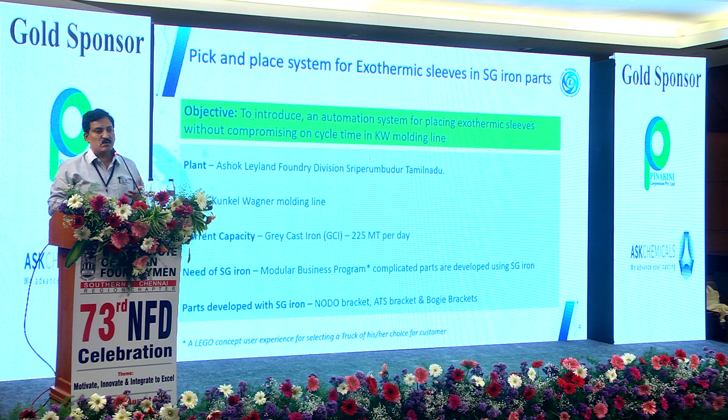It's a Lego concept. Similarly, if you go to a pizza store and want to order a pizza, you have a menu with different sizes, different layers of topping, and different ingredients. You just order according to that and get the pizza delivered at the next counter. Similarly, we want a dealer customer experience where we give the customer the choice—go to a dealer place, press 10-15 buttons for whatever options you want, road condition, load condition, and you get the vehicle you want.

He can place an order. Once he likes it, it goes to a manufacturing line and follows a sequence of manufacturing. That is the concept we introduced in 2020 when COVID was about to start, the pandemic. It has picked up in a big way, and we are almost getting orders where 30% of our ordering is in that concept.

Our customers are feeling happy because they are getting the product what they want, instead of us giving something traditionally where they have to choose. Here he is choosing, and we are making it as per his choice.

So we have 3 products in that vehicle concept, that is Nodo bracket, ATS bracket and bogie bracket. So why long SG iron products in trucks?

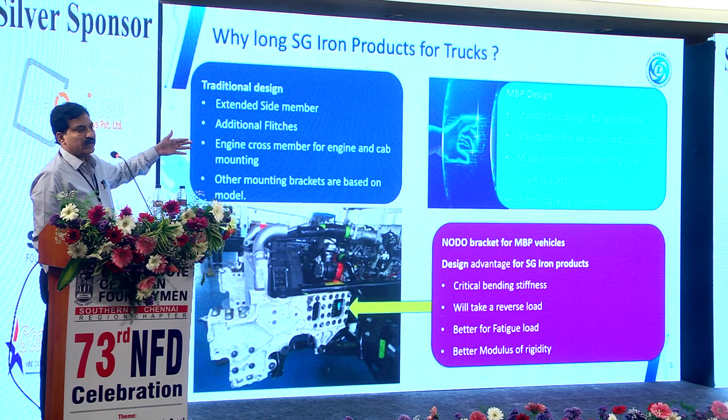Traditional design uses extended members and additional flitches like engine cross members. In the modular business program design, we have a standardized design for all the vehicles, standard for all road conditions, which will withstand that. Multiple mountings on a single bracket is the main advantage, since you have so many fittings coming into this.

Then better stack up tolerances. Because you have an integrated member, you have better stack up tolerances, and it will help you in better vehicle rigidity. So this is one example.

What we are saying is a Nodo bracket, which has critical bending stiffness, will take a reverse load, better fatigue, and better modulus of rigidity. These are the examples I have shown you.

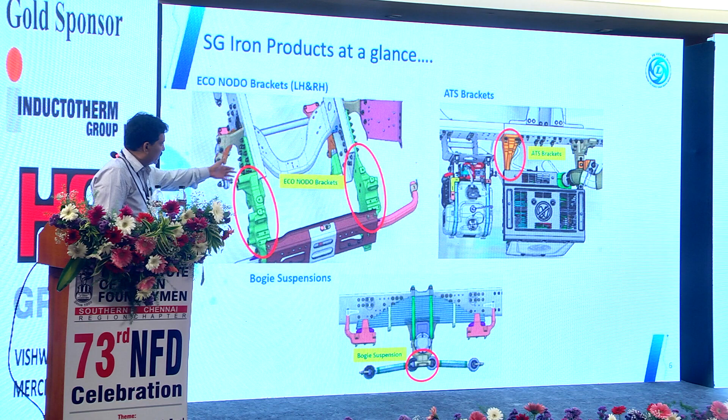This is a Nodo bracket. There is an ATS bracket supporting the after treatment in the vehicle. Then we have a bogie bracket, a bigger element, which is almost weighing 500 kg.

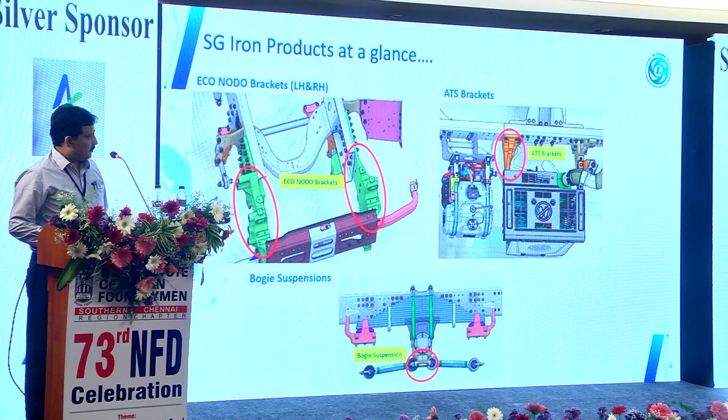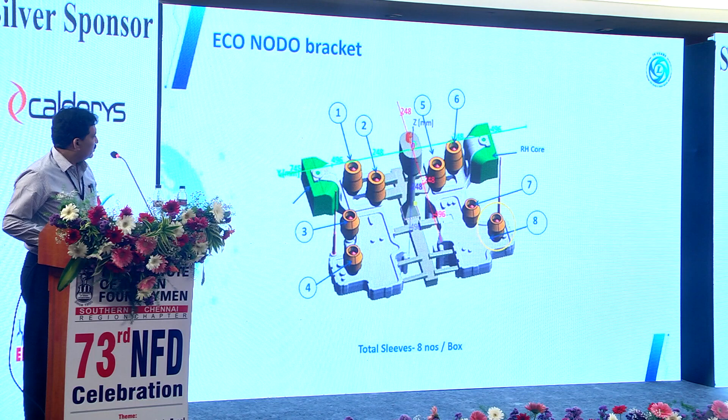This is a typical Nodo, Eco Nodo bracket. It's the arrangement in the mold box. Different types of sleeves are there. This is the arrangement what it looks like.

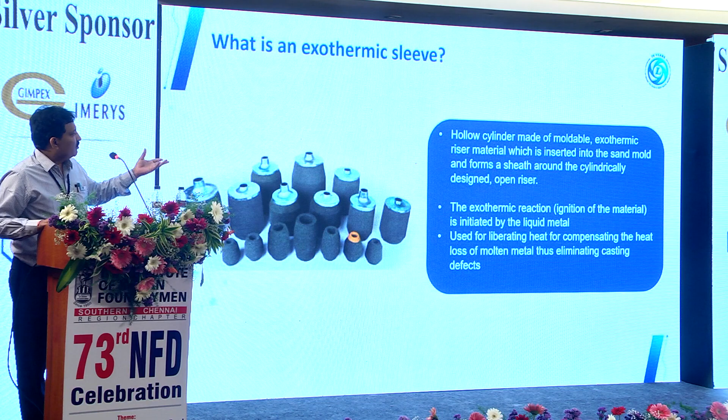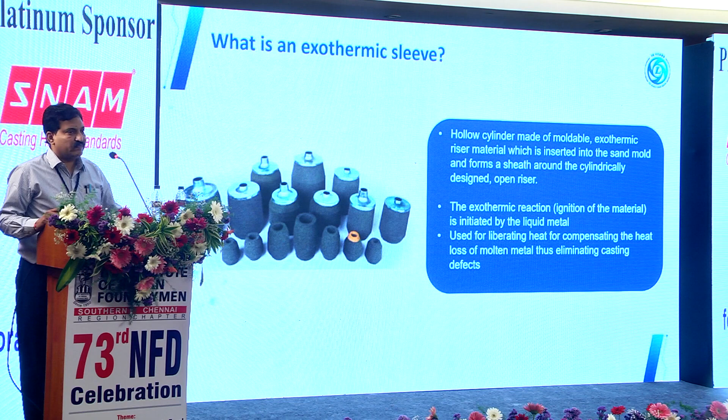This is made just for understanding what is the exothermic sleeve. An exothermic sleeve is a moldable material in the risers. You see that exothermic reaction, it melts and keeps the hot metal intact, and it flows, maintaining the temperature and flowability. This eliminates casting defects, mainly used for casting defects.

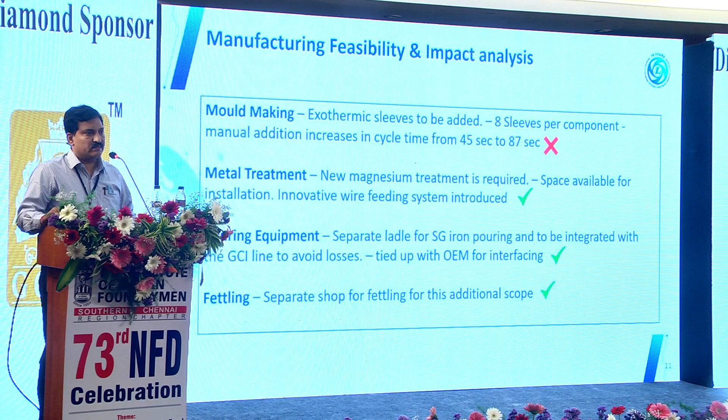So while introducing this, we checked in SG iron parts whether all our lines are ready. We checked in the molding, mold making area, so sleeves are to be added. When placing this sleeve, I have a challenge of traditional machine cycle time going from 45 seconds up to 83 to 87 seconds theoretical time. It's increasing. There is a challenge.

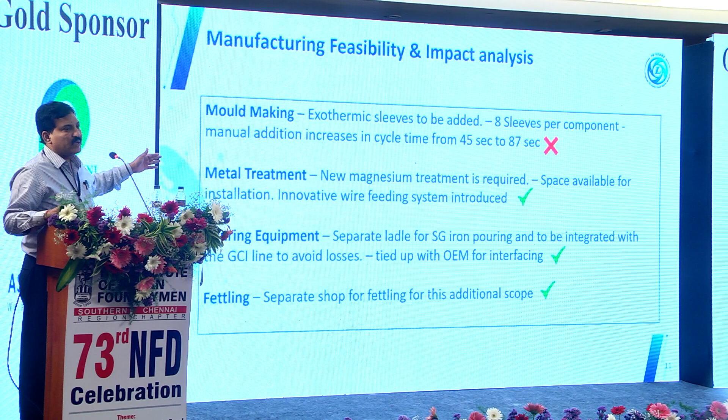We have a magnesium treatment, metal treatment. We introduced an innovative wire feeding system, which is solving the problem of magnesium treatment. On the pouring equipment, we have a separate ladle for SG iron pouring, and we have tied up with the interfacing because we need to pour and interface with the molding machine. With the OEM support, we are able to do that.

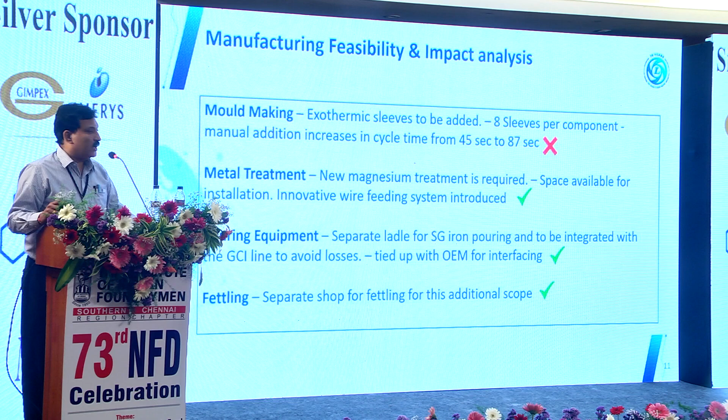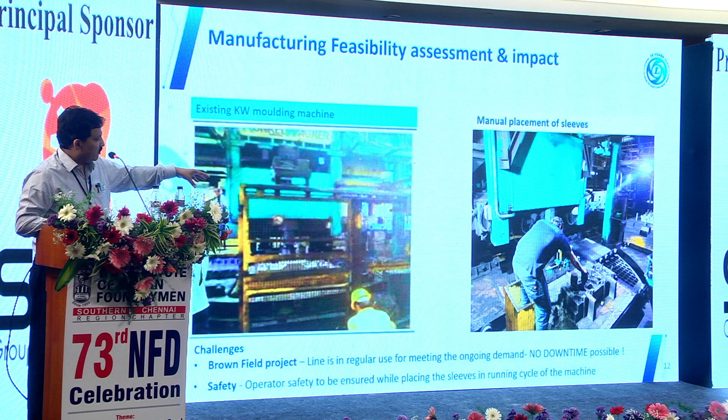And in fettling, we have a separate area, so it is nothing to do with the regular process. With all these things in mind, in the existing molding KW machine, the sleeves which have to be placed on the machine are placed by compromising on the safety and placing onto the drag. So we have a regular running line.

Please understand, in a day we will be running GCI, grey cast iron, as well as SG iron we have to run. The first time when we introduced it, you have to intervene and go in to place the sleeves on the line. It is a safety compromising thing, as well as more time is taken.

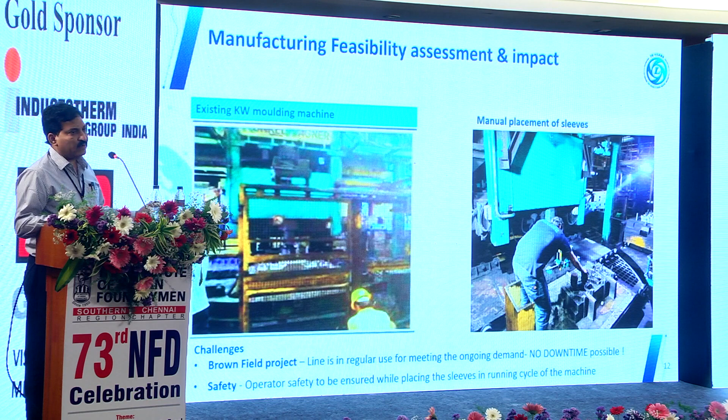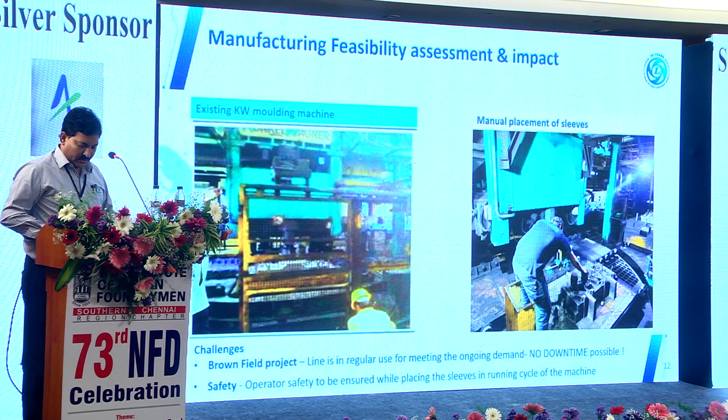More than safety also, safety is of paramount importance. The time taken is very high, so you have to stop the line for a longer period. With that in the background, we plotted down what all the activities involved. Against the activity, as a planned requirement of 45 seconds, we are going up to 87 seconds, which is more than 93% higher.

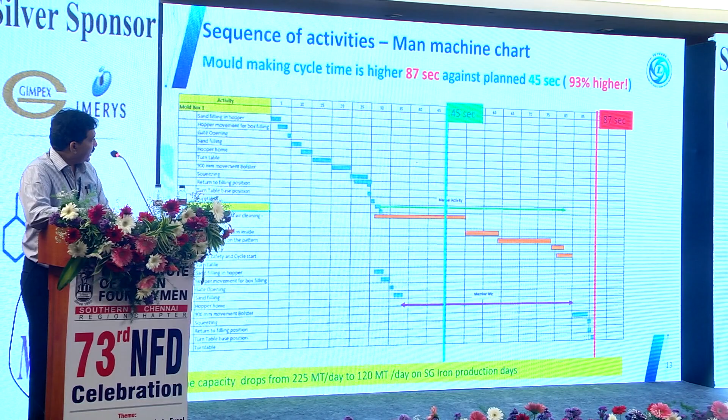Because of that, what is happening? We have a grey cast iron requirement of 45 seconds. In SG iron it's going up to 87 seconds, and the capacity is dropping down more than 50%, around 50%. And more than that, I told you about EA index. EA index is an Ashok Leyland standard, efforts and ergonomic index. We have an index which will show how much effort is required by the operator and how much ergonomics is used in these operations.

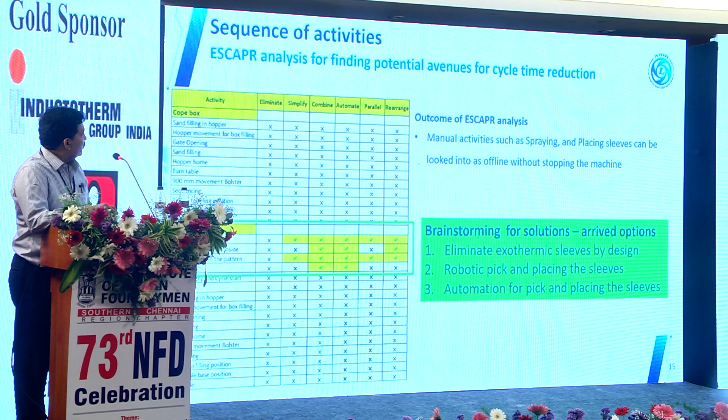So we have gone with a regular problem solving approach. This one, for those of you who are not familiar, is various methods used for simplifying the operations, like eliminate. Can you eliminate some step, whatever the process steps previously are listed down? Can you simplify? Can you combine? Can you automate? Can this activity be done in a parallel way? And can you rearrange this system, whatever the system available?

Out of these things, we found out that in a particular area where I highlighted yellow color, there we are having the scope for improvement. So we have manual activities such as spraying and placing the sleeves that can be looked into. Can it be done offline without stopping the molding line? When we did that, we came out with a brainstorming idea from the team.

Can we eliminate? We just questioned. Like earlier, can you ask without additives, without resins, can you do the mold making? Yes, we can do it. So similarly, we asked, can you eliminate exothermic sleeves by design? Similarly, robotic pick and place, can we do it? Can we do some other automation? So we had these ideas.

So when we went to the drawing board, we found out that these thin sections are not possible, they cannot be modified because of these critical design factors. These trucks are designed, as I told you, in modular fashion. When you are having a heavy load, I cannot design for a lower load, and then when heavy load comes, this bracket will fail. I don't want it to fail in the field. So we cannot modify, there is no compromising there.

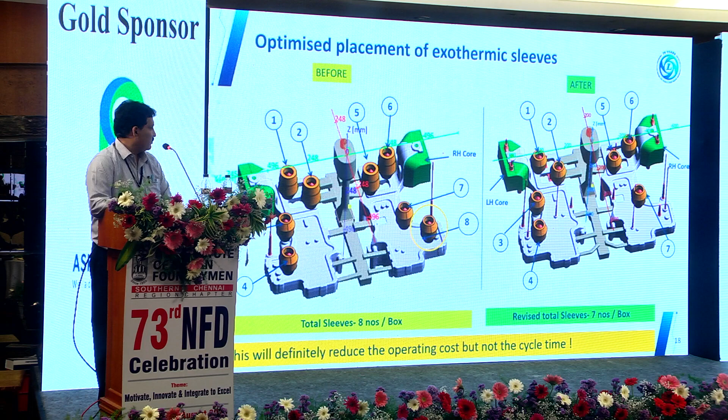So then we did the magma analysis and found out the hard zones and all. We found out that, okay, we can optimize maximum. My design department told me we can reduce a maximum of one sleeve. So what else? So they have given this design. This will definitely reduce the operating cost because one sleeve is costly. All of you know that exothermic sleeve is a very costly process. But it cannot reduce the cycle time.

So we've gone with a robotic pick and place system. This molding machine is there, so it can pick the sleeves from the storage area and place them. What we found out is a very good solution: faster placement of sleeves, completely automated, integration is possible, operator safety is 100% ensured. So what are the negative points?

Still the cycle time is high because in 18 seconds, 20 seconds, we need to place this pick and place. So we found out that overall for one cope and drag it is taking 75 seconds against my planned 45 seconds. So more space is occupied and it is also going into the gangway which is working space.

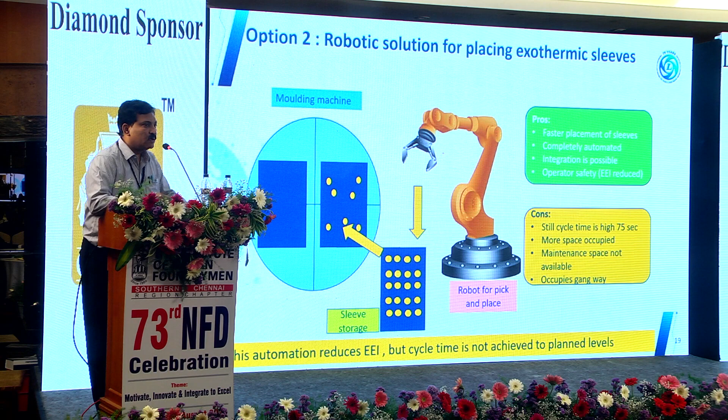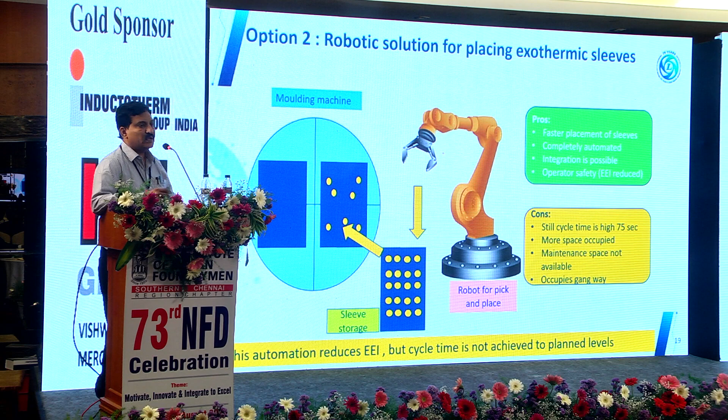Robo needs a protective space, you cannot take chances. Sometimes it malfunctions, you have to go into the backside, so you cannot compromise on that factor of the robo. Nowadays robos are coming with a factor where you can define the working zone, but still maintenance can override it. When you are doing maintenance, something can happen also. So those type of things we need to take into account. So this automation reduces EEI, but cycle time cannot be achieved to the planned levels.

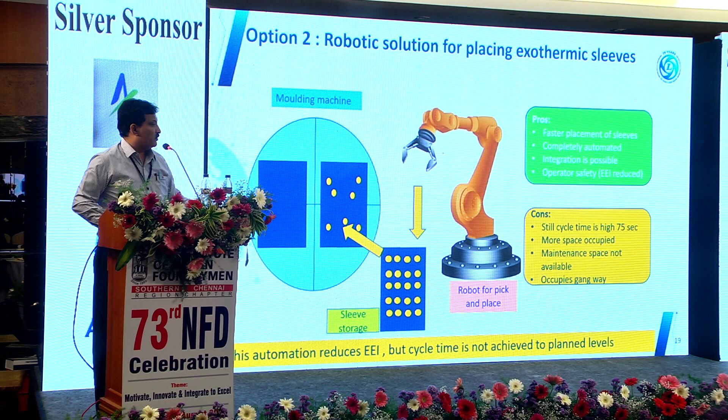So what about automation? Can we, we don't have any other choice, we have to go for automation. What the OEM has told, sorry boss, I don't have such technology with me. I had done somewhere in Germany. I heard the Indian counterpart told me, I heard that somewhere in Germany it was done, but we don't know.

So the second thing is there is no similar experience in other foundries also, whatever limited. Then automation houses, a lot of automation people come to you every day, saying we do this automation, that automation and all. So when we approach them, sorry, we don't have that experience in this, we can attempt, we are ready. So in a brownfield project, we need to have assured solutions, then we can take the risk of going to an automation solution provider. Whereas in this case, I am having a person who will tell me that I will do it.

But at the end, if the team doesn't have the experience, at what cost do I do this automation? So I have to be very careful. We decided our team has to transcend to a higher level. We pursued the OEM - let's take the risk. This was the biggest point, we decided to take the risk and go ahead.

Then we encouraged collaborative work. We collaborate, we share our knowledge - you put your knowledge and take this forward. And we used AL's own expertise. Ashok Leyland has our own team who does automation day in, day out in many of the manufacturing lines. So why don't we leverage that experience? That's the path we took.

So we decided to co-design the system with the OEM - we approached them, and as a result we pursued the OEM. Yes, they agreed, yes we will take it forward. And design verification was done for effectiveness, with multiple iterations. It's not that we just did it casually.

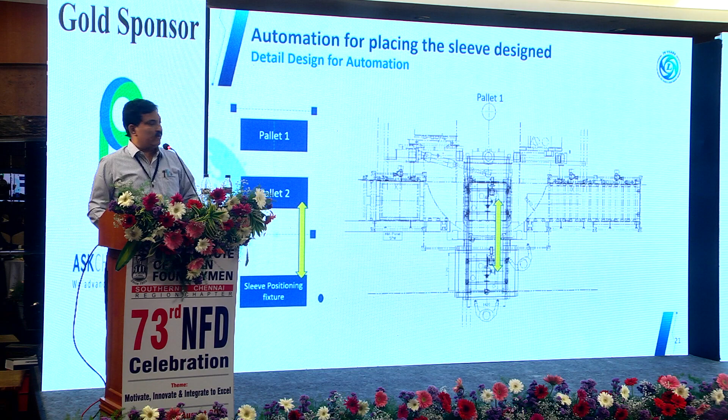Then we did verification of interlocks. We didn't want the molding machine team to later say, sorry, we checked our PLC and this integration isn't possible. So we did upfront verification with the OEM. Why I'm emphasizing all this is that these are things you need to do in parallel before implementing a solution, before concluding, even before ordering.

That enables you to sail through the total process and crush the customer lead time. Many times the customer wants it in 2 or 3 months - how do you squeeze those timelines if you go sequentially? So this is one automation we thought through, and we went ahead with pick and place.

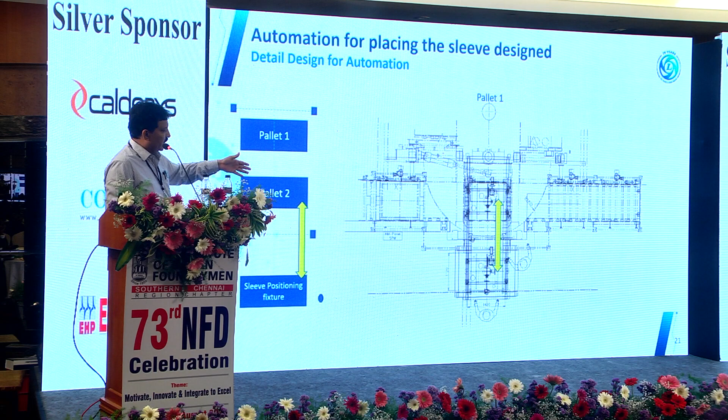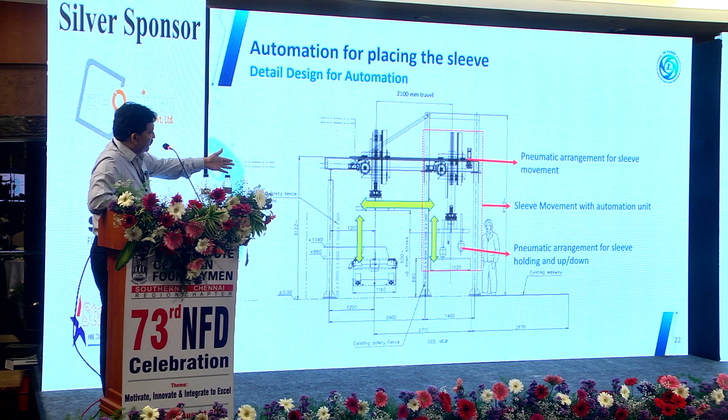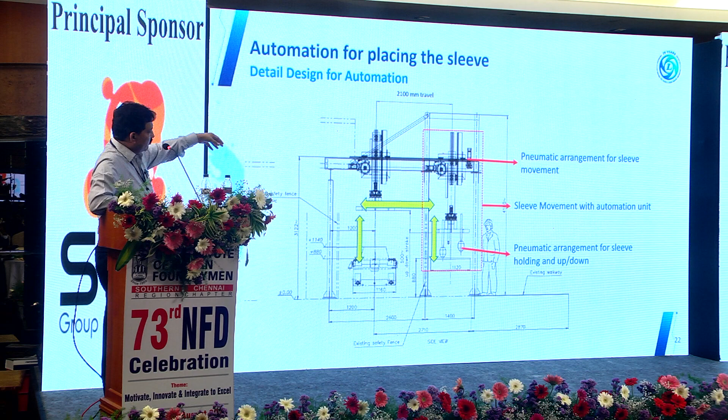The operator is now placed here - let's move forward, I'll show you better in the next view. There is a pick and place mechanism. The yellow arrows indicate how the sleeves are placed in a convenient position for the operator outside, where they are picked up by the gripper. It moves inside the molding machine, places the sleeve, and then goes back. This is a very good mechanism - we were happy to arrive at this solution.

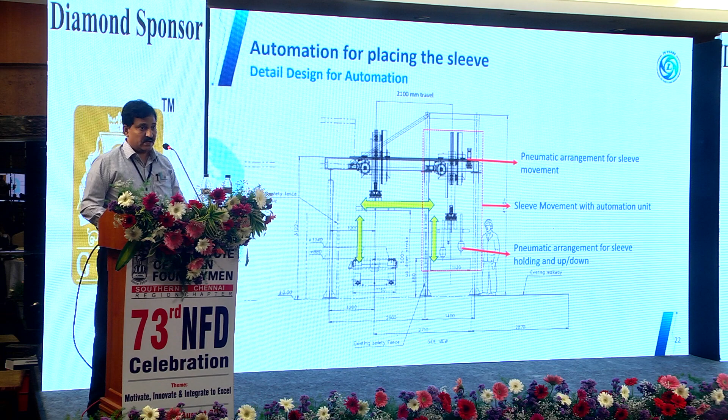So we did the cycle time mapping. Originally 45 seconds, but we found it came out to 62 seconds. So here's the question - for grey cast iron 45 seconds, for SG iron 62 seconds was okay, and management said the low volume is there, you can go ahead. But what if the volumes increase? I'm compromising from 45 to 62 seconds.

Those working daily on the molding line know how much this impacts productivity. You're going to lose heavily on tonnage - your top line and bottom line, everything gets impacted. So what do we do? We have no choice but to bring it back to 45 seconds. Here is the critical challenge - you've done the automation and got a solution ready, but you're not able to implement it.

So our team again went into a brainstorming session, adopting the same technology. Now we put the automation steps in between so we could map against what could be done. And the team again came up with ideas.

So we have done a brainstorming. Can we change the sequence of activities a little bit? Can the travel distances anywhere be reduced or minimized, so that we can have better cycle time? So then we have options that arrived. Can we do some offline activities, can the online activity be done offline?

Can we combine that, like spraying? Spraying can be combined with while movement is happening. Can we do like that? Then reduce the travel distance with pre-positioning. Can you keep everything ready and ready just to feed inside?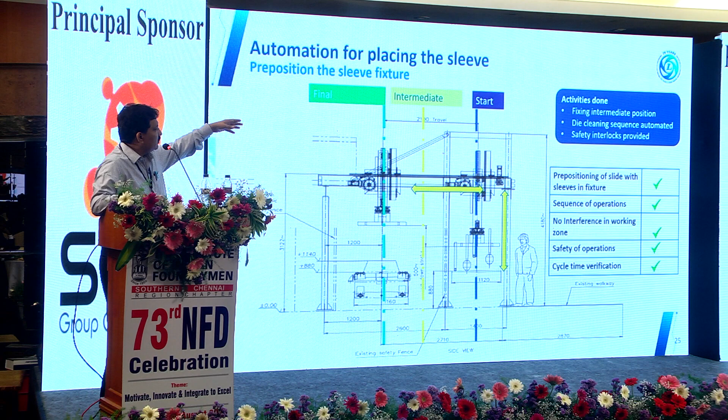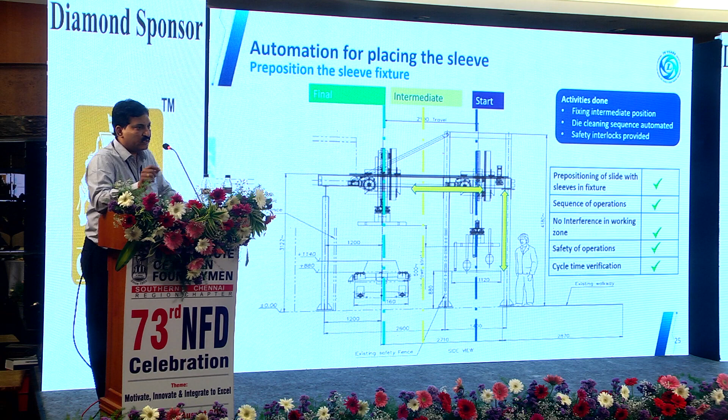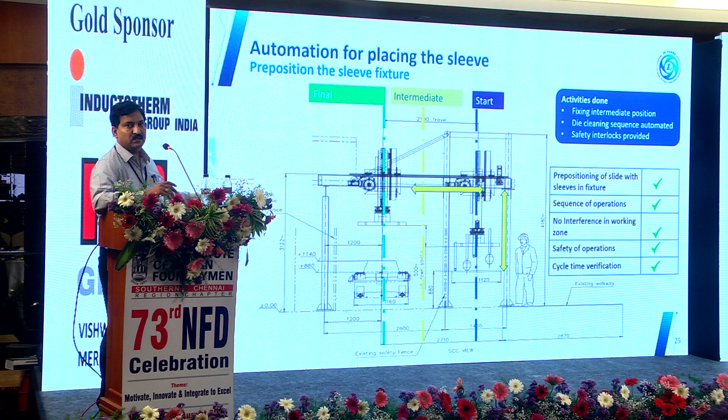Then when the cleaning die moves, track side moves outside, and you clean the portion for the residual sand, and your spraying and all can be done parallelly, you can just go and place it. So by this time what is happening is your next loading. The next set of sleeves are placed into the pre-fixture, which is available outside, ready for the next cycle.

So this type of approach has ensured pre-positioning is possible, sequence of operations maintained, no disturbance, no interference in the working zone, safety of operation is guaranteed, and cycle time verification also done. We have safety curtains outside the operator area, so the operator need not go inside the area. When he goes inside for any reason, if something is not placed, the machine will stop. That interlock we have provided.

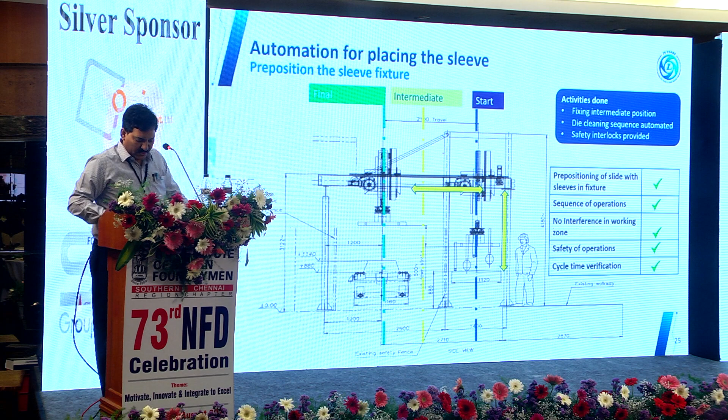So with this, all these systems we have completely integrated, and we verified the cycle time. Now it is again at 45 seconds, we have gone down to 44 seconds. Earlier in grey cast iron it was 45 seconds, now with SG iron, it is 44 seconds cycle time.

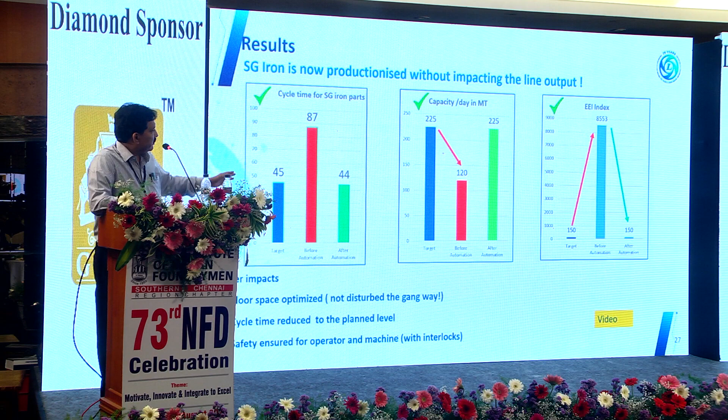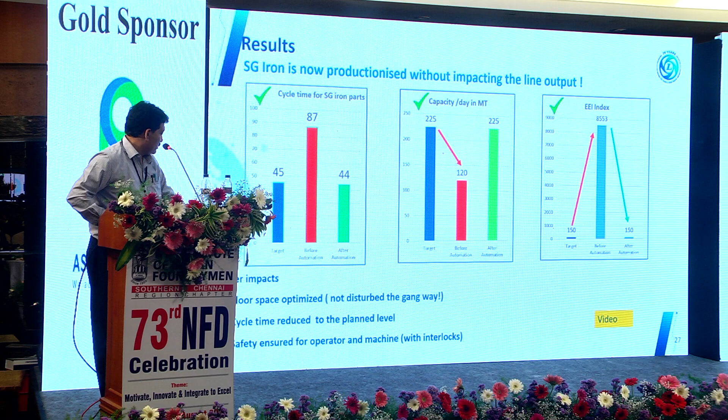So our cycle time has gone back to 44 seconds. Capacity, which had dropped to 120 theoretically, is back to 225, and the EEI index, which was 8553, has gone back to the normal index. So floor space is also optimized because we have compacted the area, and cycle time is reduced to the planned level, and safety is ensured for the operator.

So our theme is Koi Manzil Dur Nahi, meaning no dream is too far. Everything is possible when you think, when you strain to a level where you have set the target. As one of the speakers mentioned earlier, you set the targets and achieve against the target, and then you can do that. So this year's theme is Koi Manzil Dur Nahi, no dream is too far. Thank you.

Pardon? Yeah, sorry. Thanks for reminding.

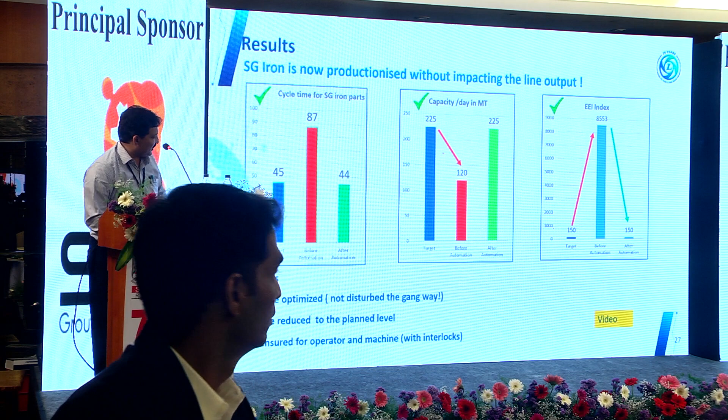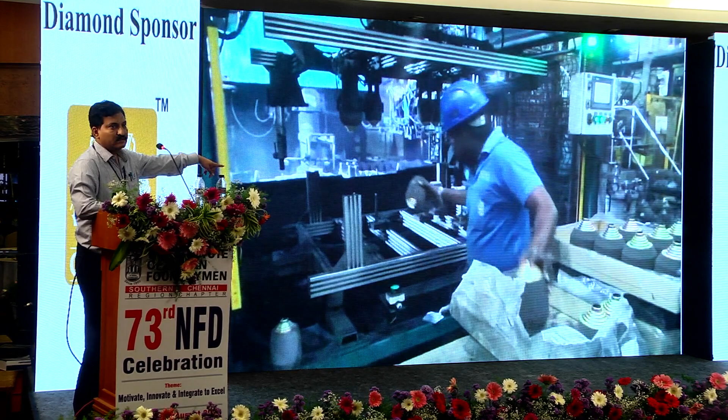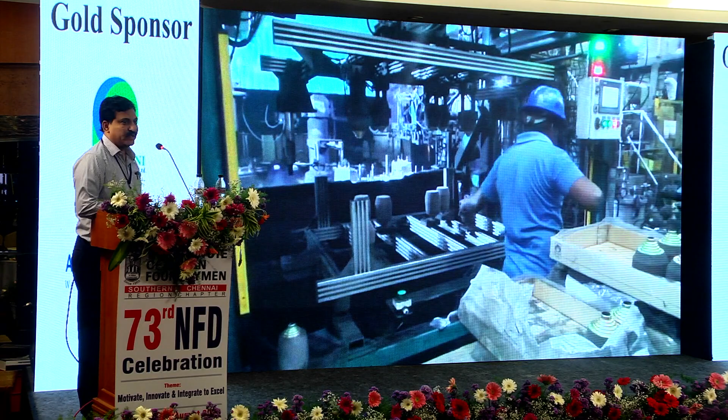Because of the video shooting, our hero here takes multiple takes, like in a film. He is also a little nervous. He forgot to remove these gloves, he is taking them off.

So these, you see on the top side there are sleeves already placed. The die coating has happened. Now it is going inside, pre-positioned inside the line.

So the activity is over. All sleeve loads placed in less than 5 seconds. Now this is in pre-position still. Now you have ample time, whatever you want to do, you do it. That activity is over now. It has come to the home position now.

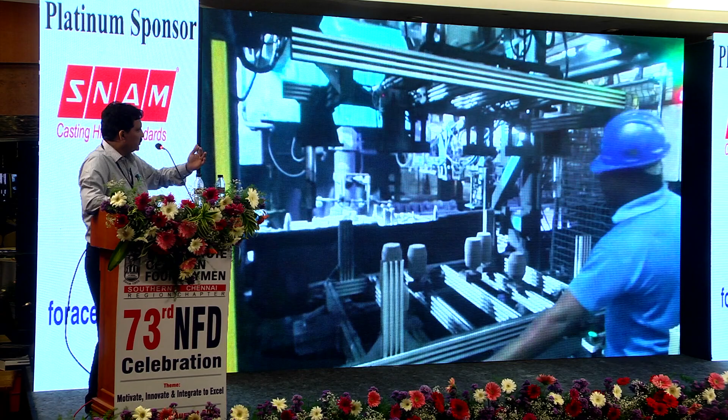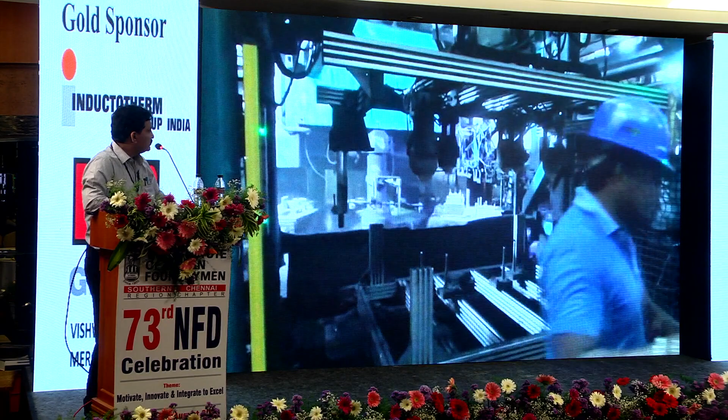Now he is pressing cycle start. This will go up, he will start placing the next sleeves. He has enough time. So one cycle is complete now.

Yeah, that's all. Thank you. Thank you, sir. Thank you. Any questions?

One question, not on the main subject, it is on the EEI index. Everyone can listen to you, sir. The question is on EEI index, how it works, how it gets calculated.

Normally you must be aware, in industry we have something called Maynard Operation Sequence Technique, which is used for calculating the operator's work in a scientific way. It is a very old tool, but in a scientific way you calculate all the operator movements and the time taken for those movements, including the bend, twist, turn, walk, everything is calculated scientifically.

One of the biggest advantages with that tool is you negotiate with the union without any bias. Union is very much 100% aligned if you do with the MOST. So that is for the standard IE cycle times.

Similarly, we arrived at this sometime back in 2013-14, when we found out that MOST alone is not sufficient, because there are some repetitive tasks which cause one operator to get strained while another operator doesn't get strained at all. So there should be a parity among these activities among the operators. We found out that the effort taken by one operator is more than the other operator.